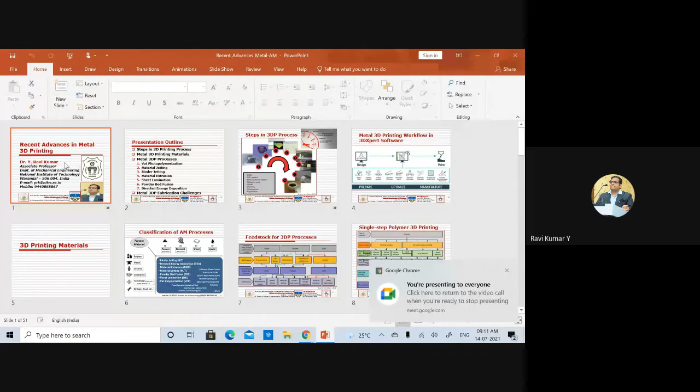You might have already been exposed to this exciting technology called 3D printing. During this session, I'm going to present the recent advances in metal 3D printing technology.

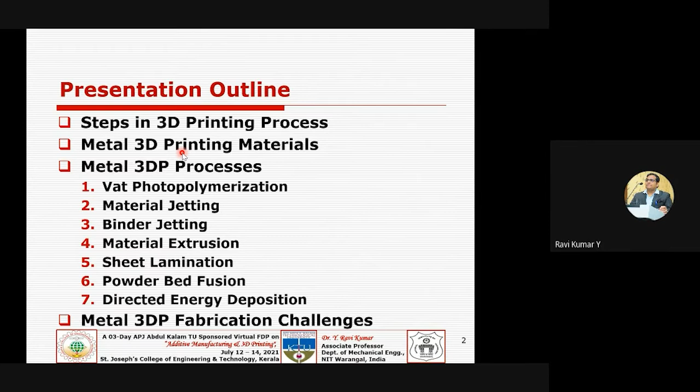Coming to the outline of my presentation, let us start with the steps involved in the 3D printing process, just a quick introduction to this process. We'll also be spending some time on the material aspects of 3D printing and metal 3D printing. You may wonder why I kept all these 7 processes listed here.

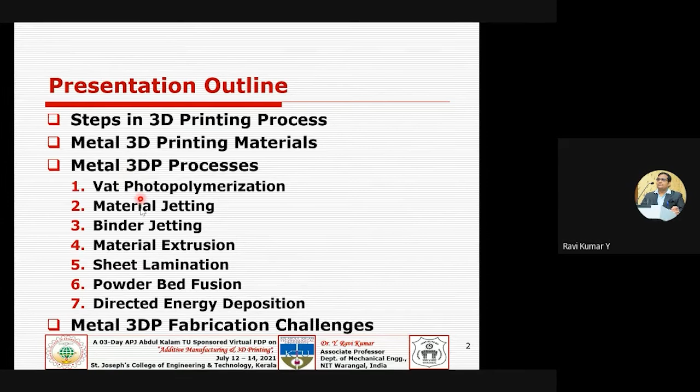So under the metal category, you may wonder about the scenario of 3D printing, formerly known as rapid prototyping. This journey started with a process called stereolithography, which comes under VAT photopolymerization. People used to print only polymers. I'm talking about the inception of this technology, that is the late 80s and early 90s.

The journey started with polymer printing, but slowly it captured the attention of manufacturers rather than just designers. Designers used to use this technology for validating their designs by making prototypes, but then this technology gained a lot of attention from manufacturers also.

So then coming to the technological advancements, even a VAT-based photopolymerization system now could be able to generate, to some extent, metal parts also, and ceramics also.

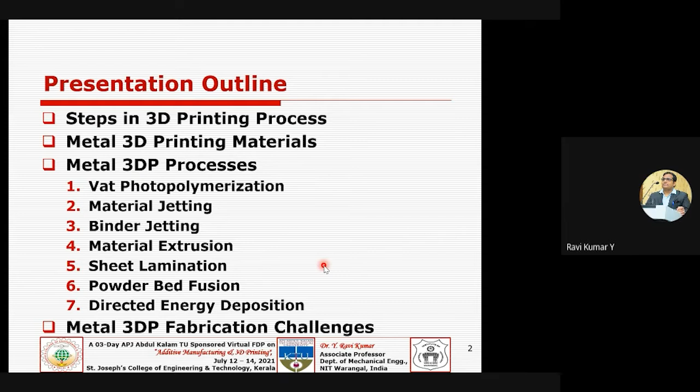So if you see the steps involved in the 3D printing process, first check what is your application, what is your product. The product may simply be a coffee cup, or an automobile, or an aircraft. But the application and the requirements may be different based on your application.

But whatever may be the application of your product, first we need to start with a CAD model. That is digital data as input, which brings our product into a CAD model, a computer aided design model, either a solid model or a surface model. And that model should be represented as a triangular mesh file, the so-called STL file, stereolithography tessellated language called STL.

And that STL file has been imported to an interfacing software, which will be connected to the printer. So you have an interfacing software, and that software will take this STL file as input, and we need to specify the process parameters.

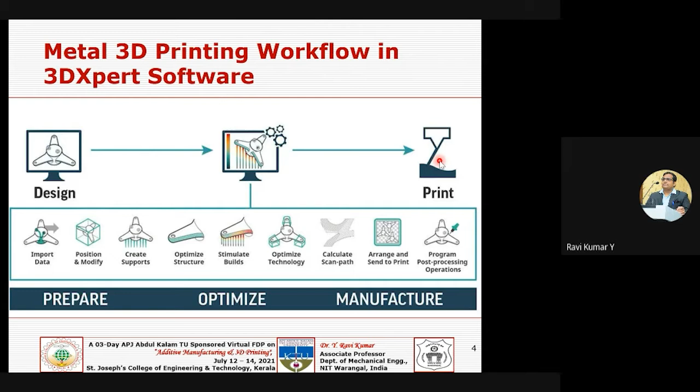So with this workflow, we will talk something about the material side - whether all materials can be 3D printable.

If you talk about engineering materials broadly, you have polymers - thermosets, thermoplastics and amorphous polymer groups - and you have metals, and metal alloys can also be processed through additive manufacturing or 3D printing. The same is true for ceramics and for composites, so all four standard engineering material categories are quite common in 3D printing.

Then we also have functional materials, like electronic or shape memory materials, which could have some specific functionally graded properties or specific functionality. So those materials could also be processed through additive manufacturing or 3D printing.

Apart from that, you can even process natural materials - it may be a biological material. Even now people are targeting bio-printing. I hope you have some medical sessions also, where you can print living cells or tissues, or scaffolds. You can even print food, or construction waste, or any sort of material you are looking at. So apart from the standard engineering category of materials, it is quite possible with other materials.

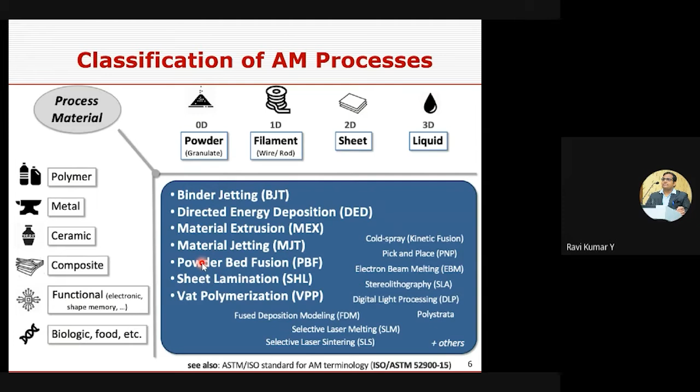Further discussing the feedstock of 3D printing processes - the feedstock's physical type when fed into the printer could be either a liquid form, a powder form, or a solid form. That is before it is fed into the printer.

Once it has been fed into the printer, what could be the principle behind how your raw material gets processed? Sometimes it may be through a chemical reaction like polymerization, or simply a jetting principle - inkjet or binder jetting - or sometimes you may be atomizing the powder or even a liquid. You can see some cross connections, not one to one, so we can notice developments of multiple materials or multi-form, from one form to another form.

That will enable you to go with multiple materials, or functionally graded materials, or even a sort of composite. So a powder may be atomized, or powder may be melted and solidified, or if you have a solid material, it could even be a joining process, like simply welding - your solid raw material can also be joined. Sometimes the solid raw material is getting melted and solidified too.

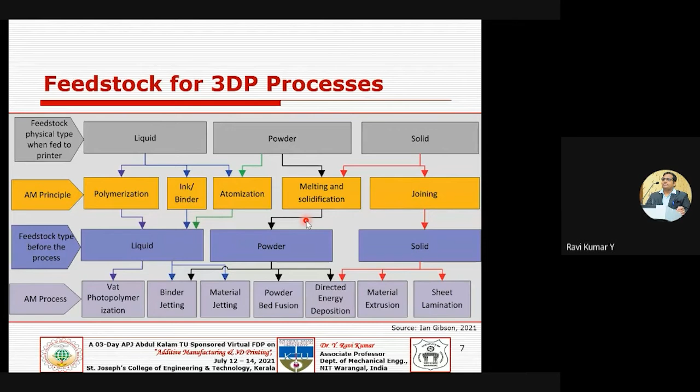Coming to the VAT system, only one form, that is liquid. Coming to solid, which could be predominantly sheet lamination and material extrusion process, the raw material is in a solid filament, a rod, or a strip. Or it could be a DED system, where powder can also be used as a raw material. Even a metal rod or a metal sheet can also be the raw material for directed energy deposition.

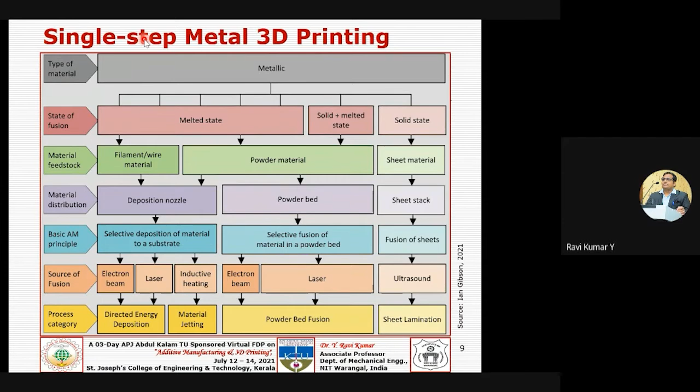This is about single stage, single step metal 3D printing, possible predominantly with 4 processes. And if you talk about multi-step, say, by any way I need to get the metal part printed - I have, even the VAT system can also be done. Ceramic or even metal can also be done, right? But how do you do that?

I'm not going to explain these steps, and I don't want to get you bored. But the idea here, keeping this slide, is that it may not be in a single step that you're going to get the metal part - you may get a green part, or you may get a combination of polymer plus metal, maybe some composite material which joins your polymer as an adhesive.

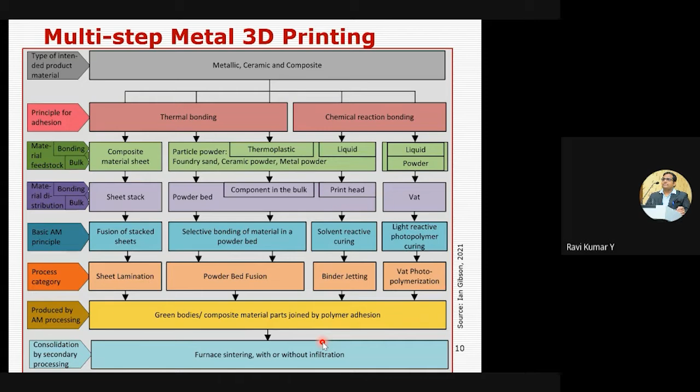So you have adhesion as a polymer with a metal plus powder. So then you take that green part and use the furnace treatment, making it a brown part by keeping it in a furnace and doing debinding. Sometimes we do infiltration, sometimes we do not. So what I'm trying to say is, by using a secondary process, your green part or composite part can also be made into a metal, 100% metal component. So with this background, let us talk about some of the metals, because our talk will be focusing on the metal.

If you talk about the iron-based group of metal alloys, you have stainless steel 316 and 316L, and it can be done directly with powder bed fusion, DED (directed energy deposition) system, and binder jetting technology. I'm talking about direct, but indirectly or as a secondary process it can even be possible with the VAT system. I mentioned this as a single-step process for processing 316, 316L, 304, 17-4 PH, 18Ni300, 15-5 PH, 420, 347, 1033, 4130, HY 100 steel, even tool steel H13, 4340, M2, and other iron or steel alloys like Invar and carbon steel. You have a whole series, and even pure iron can also be processed through either a powder bed system or a binder jetting system. These are the well-known iron-based alloys.

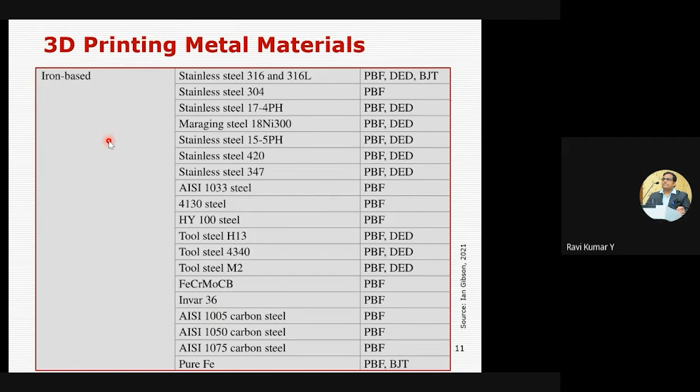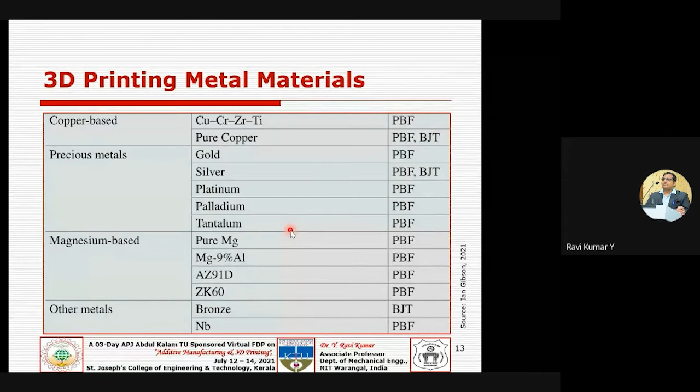So with this background, we'll see the advancements of these processes from the perspective of material, that is metal printing. And of course, let us start with the VAT-based system, because this was the technology with which the 3D printing journey started, a process called SLA, which Chuck Hull invented, based on the VAT-based system. So in the VAT-based system, as a single step, it may be only polymer or plastic, that is epoxy resin.

You will be curing your epoxy resin or photosensitive resin through either a laser—laser was the initial energy source it started with—but now even a DMD, that is a digital micromirror device, or an LED or LCD based projector system can also be used. The initial energy source was only a single point laser beam, so obviously the build time is high, because it is processing point by point. But with advancements, the entire layer curing can be done in a single go by creating a mask, so it may be 30 to 40 times faster than an SLA laser-based system compared to a projector, LED, or LCD based technology.

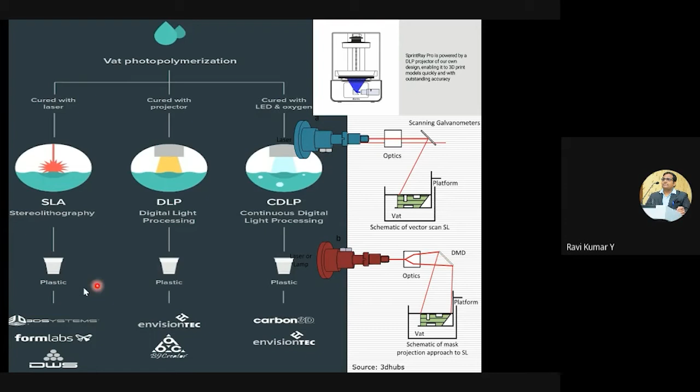But still the material is the epoxy resin. But why I've kept this here under the title metal printing, I will come to that. You can produce a metal or ceramic part even through an SLA or DLP based technology. How it is possible is that your photo resin is mixed with ceramic powder or metal powder, thoroughly mixed, and that mixed slurry is prepared and sent through this tube, and the working principle is the same.

I hope the previous speakers have given a lot of insight about these processes, but again I am telling you about the possibility of printing with metal. This technology started with plastic printing or plastic jetting using epoxy resin, similar to the previous VAT system. Instead of a VAT, you will be jetting from the nozzle - that's the only difference - but it works with the same chemical bonding, that is a polymerization process, which may be the case for epoxy resins.

What I'm trying to say here is there's a recent advancement under material jetting called nanoparticle jetting, from XJet, where you can even get metal printed through a material jetting system. Then you will be curing with heat rather than using any light or laser. So you'll be depositing this metal in droplets, and then use heat energy to melt rather than solidify it, to get your component. We'll discuss this further in the next slide.

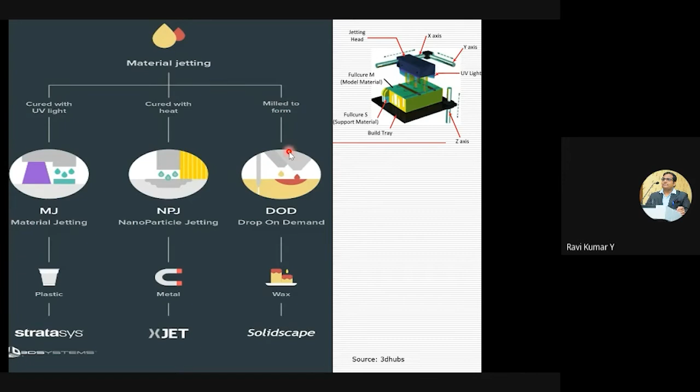Even wax is also possible with this - I think previous speakers might have discussed that, but our attention should be on the metal side. You do have beautiful polymer-based products, but coming to metal and ceramics, even that could be done, but not in a single step. Again it could be a two-step process where you're even able to print metals or ceramics through this material jetting system.

So then we need to say the metal should be jetted - that's quite funny, it seems, but you generate and create nanoparticles that get added into the liquid. Here you have support as well as model material, and you start with taking a CAD model, slicing, supports, all that stuff. The preparation of material is quite interesting and tricky here, and we need to jet this material. Then you have nanoparticles suspended, which get jetted from the nozzle at a 2 micron layer thickness.

So it is jetting from that nozzle, and depending on the temperature - meaning what kind of material you are processing, maybe steel, aluminum, titanium, or whatever material you're trying to fabricate or jet out - that depends on the heat energy source you are going to use, and correspondingly we need to maintain that temperature, the melting point temperature.

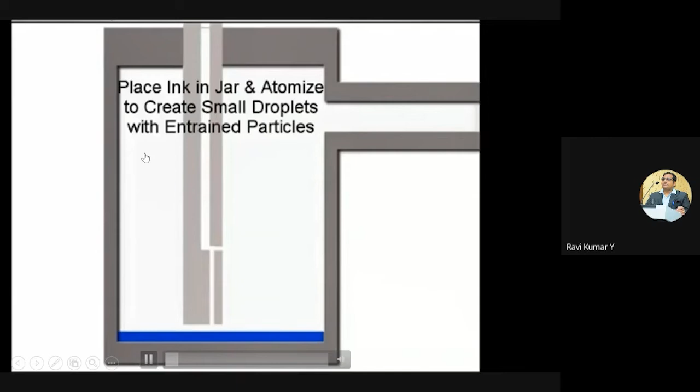Or even aerosol jet printing is another technology - let me see if this will work. In an aerosol jet process, you will be atomizing the material into a form of droplets, which they call aerosol. So that aerosol is prepared and atomized in an atomizer, and it is getting sprayed from this.

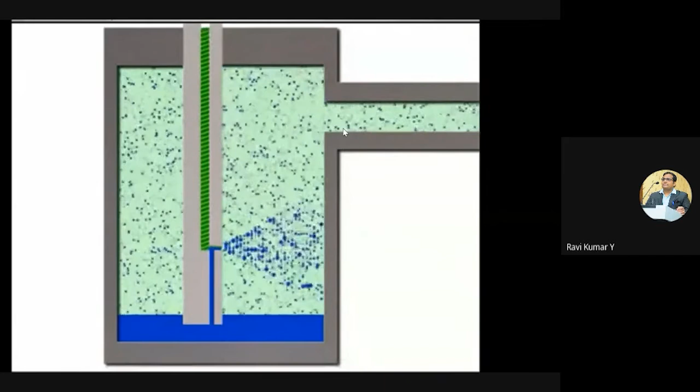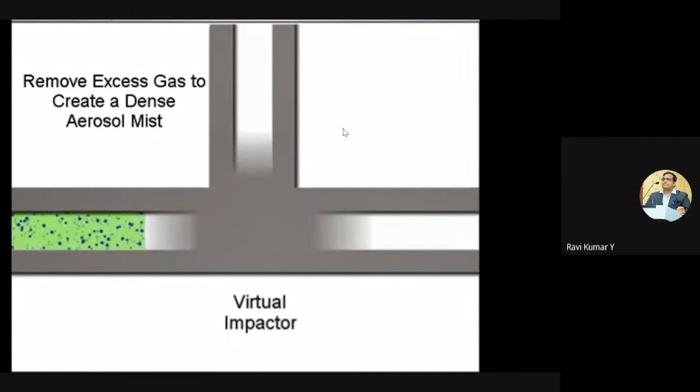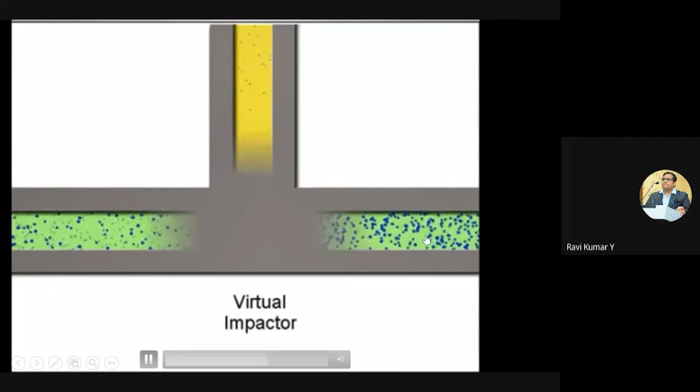Once it gets sprayed from this system, it goes all the way to this orifice to this side, where you have to remove some of the excess gases. So you evacuate those gases to create a very dense aerosol mist, which you will then be jetting through the sheath gas and depositing through this nozzle head.

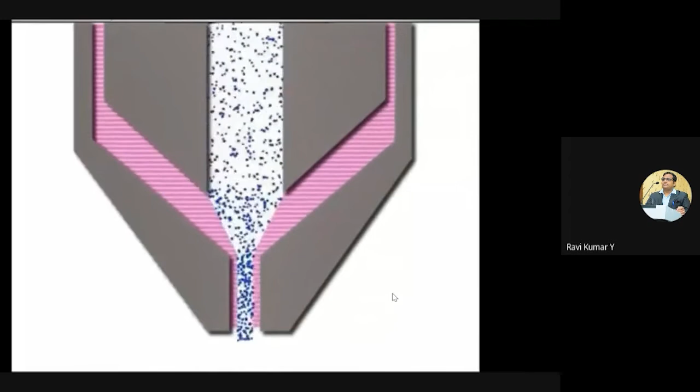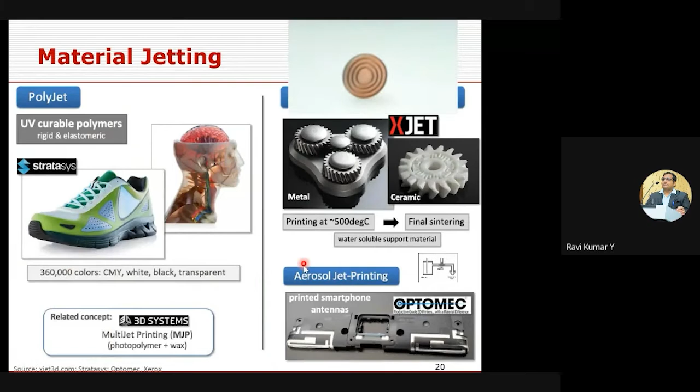So in this way, your electronic parts, electronic devices, and circuit devices can also be made using this sort of technology. It need not be restricted to polymer-based technology. It can also very well produce metals, right? That is my intention to highlight here.

And sometimes it could use electromagnetic pulses. So you take your raw material, say aluminum - an aluminum wire spool - along with argon gas. Of course, oxidation is a major problem here. Instead of printing through a powder bed system using lasers, here there is no powder and no laser, simply an aluminum wire spool.

You are just using electromagnetic pulses, which will melt your material. Argon gas is used as the sheath gas, and you have a ceramic nozzle which deposits the material. We do have several challenges here - it's not that easy, considering viscosity, surface tension, and other factors.

But people are doing it. It's gettable, right? So it is not impossible - people are doing it, it's possible. They are even attempting this with aluminum.

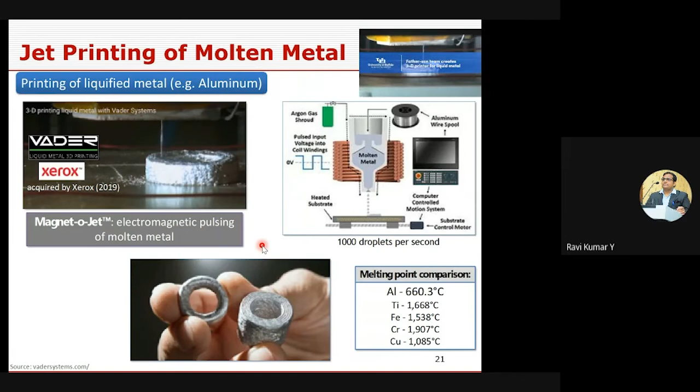It has come to the market very recently. So this is about material jetting technology for metal printing. Binder jetting is equivalently good for printing metal parts, but it need not be a single step - it could be a two-step process. This binder jetting system started with polymer as well as gypsum and sand kind of materials, but metal is also quite

gettable, printable - metal is also printable through a binder jetting system. This binder jetting system originated from MIT, the great university, and they sold the patents to 4 different companies like Z Corp, Voxeljet, ExOne, 3D Systems, and so on. As we know, HP are pioneers in 2D color printing, and they have come out with a similar technology called multi-jet fusion, but not exactly similar - it's predominantly for plastics. It won't work for metals, but our focus will be on metals, so we will focus on that.

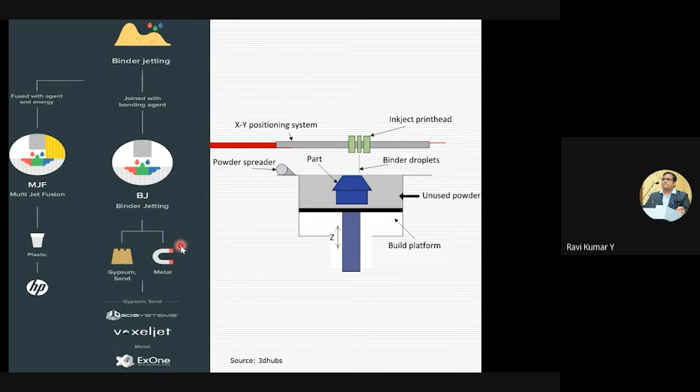So the name says it's a binder - you are going to sprinkle it from the nozzle, simple as that. You jet the binder from the nozzle, and you have this ink or binder which has an absorbing capability, getting absorbed into your powder particles. Basically the raw material is a powder granulate, and your binder, having this absorbing capability, forms a bond. You then use IR light to sinter it, and finally you get your sintered polymer.

Similarly, it could work for metal too, but not in a single step. We'll discuss how you are able to get that in case of a metal system. For the metal system, the working principle is the same - you need to jet out the binder from a series of nozzles.

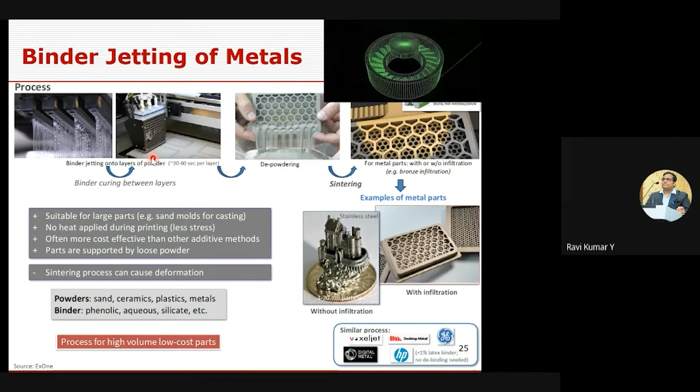That binder jets out onto the powder. The raw material is powder, laid in the form of a bed, and you sprinkle your binder onto these powder particles, curing between the layers. You get only a green part initially, which is then depowdered and finally sintered in the furnace, and even infiltrated with a bronze kind of material.

It has been infiltrated. After infiltration and sintering, this green part has become 100% metal. But it is not a single step process, as I mentioned, so sintering followed by infiltration could give the metal component.

As we know, this technology has been proven for sand cores, ceramic parts, and of course polymer parts, and now it is also for metals.

You may choose the combination binder with your powders. Say you have different binders here. If you want to process metals, you may use a polymeric binder. If processing ceramics, use an appropriate binder. If it's simply a plastic or plaster kind of material, gypsum kind of material, you use a water binder, or an aqua binder. So depending on the type of material, from polymer to metal to sand to ceramic, you choose an appropriate combination of binder.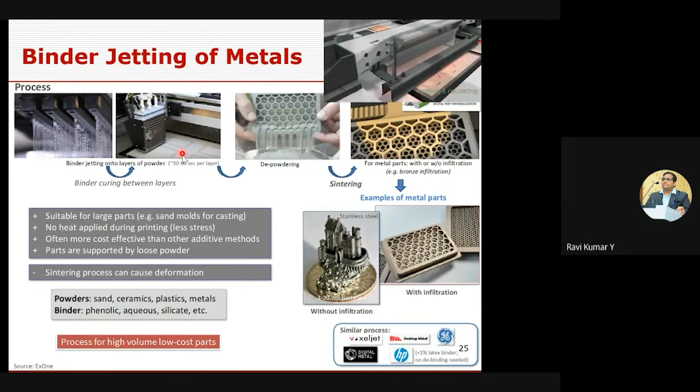So this is a typical binder jetting system for metals. And you may wonder, why is extrusion based printing of metals possible? You may get some question in your mind, why?

If 100% of people know about 3D printing technology, undoubtedly it is extrusion-based system, that is FDM based system, the filament based FFF kind of system. Why? Because these are open sourced or DIY kind of printers, which after the RepRap movement became open sourced.

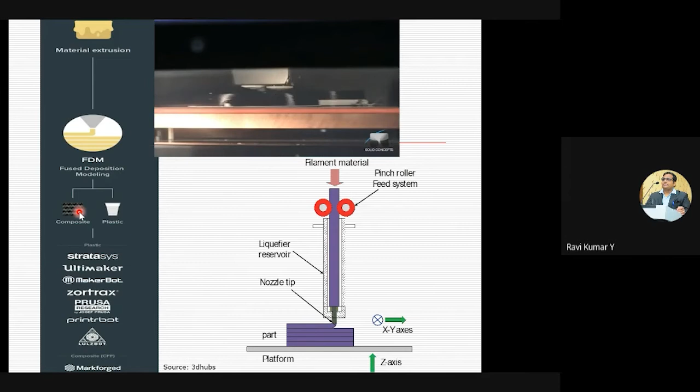Right, which you may be predominantly using plastic, ABS, PLA sort of polymers. In recent times you have composites also, processed through this FDM based system. Even metals are possible.

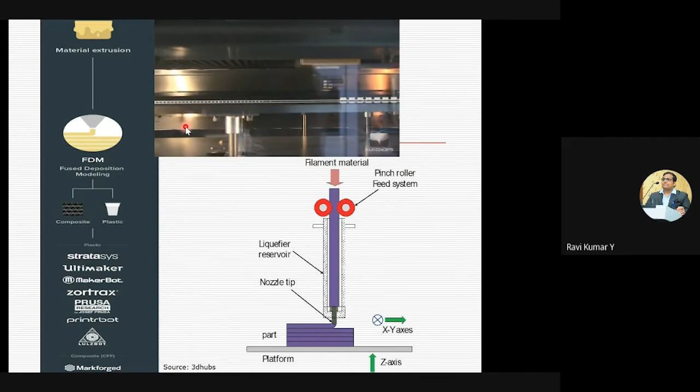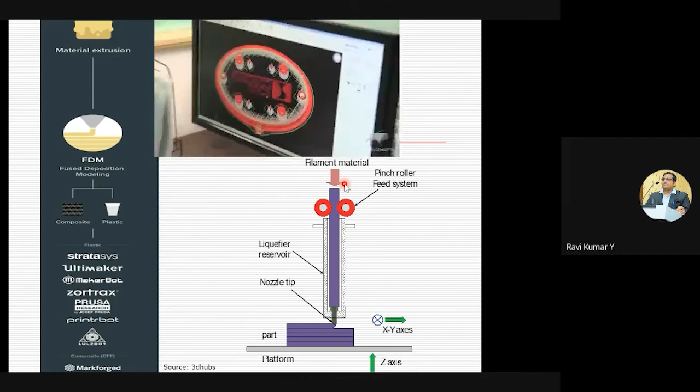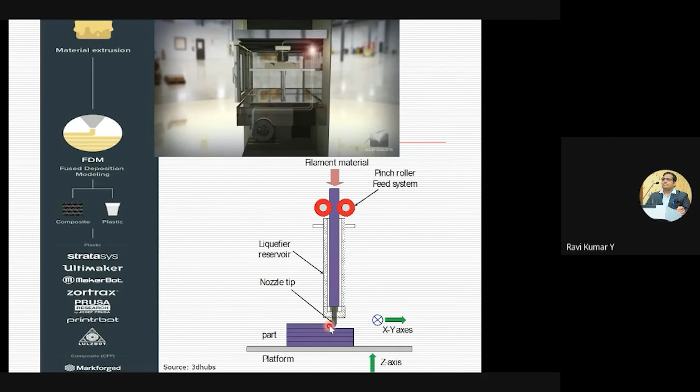You may already be exposed to this process, how it works. This may be the default printer wherever you can find. This is an extrusion based printer, which uses filament typically 1.75 or 2.85 mm diameter, two standards available. You melt it and squeeze it to deposit, basically in a liquefied state it comes and falls, and gets fused one layer upon another layer.

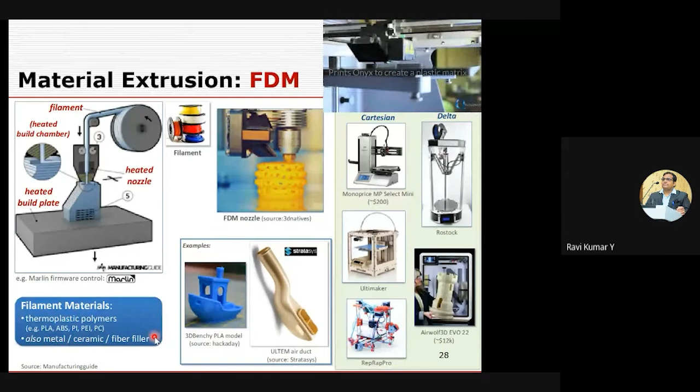That's common in FDM based systems, where you have a model and a support material, and you may be very familiar with Cartesian, delta, or other configurations of this FDM based system. But my focus will be on the metal side. So this technology is so far very good for thermoplastic kind of polymers, but now it's also being used for metal, ceramics, and fiber fillers or composites. It is quite prominent in recent times.

Right now our focus will be on metals. So how do you get your metals printed through an FDM based system? Instead of a filament wire, you start with a metal rod, of 316L, or any sort of metal that you're looking at.

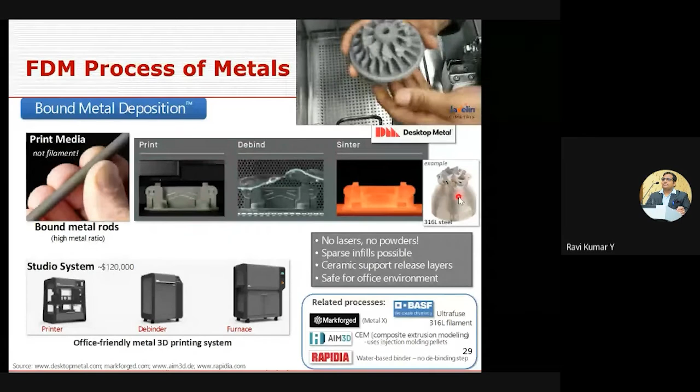Again, this is not a single step process. It may first be printed through the same principle, and then you debind it in a debinder, and finally sinter it in a sintering furnace. Finally you are left with your steel component, 316 or any other, with no laser, no powder.

It's much more economical than the powder bed or DED system, which will cost you around 4 to 5 crore rupees. This technology is quite interesting and more economical. If you do a cost to cost comparison of parts between powder bed and FDM based metal printing, obviously it should undergo printing, debinding, and furnace treatment.

Let us focus on the next technology, that is sheet lamination, and the scope of metal. My perspective could be in that way. I don't want to repeat whatever the previous speaker might have explained about these processes, but my intention is whether metal parts can be printed out from this particular 3D printing technology.

Sheet lamination, if you talk about it, is an ancient technology where we need sheets of paper, or sheets of ceramic coated papers, or even polymeric binder coated sheets, or a typical soft material normally.

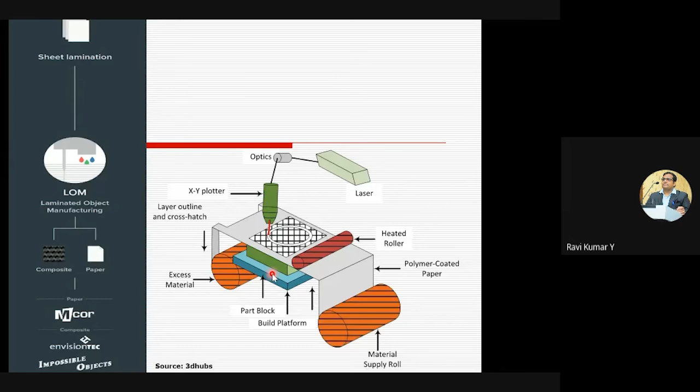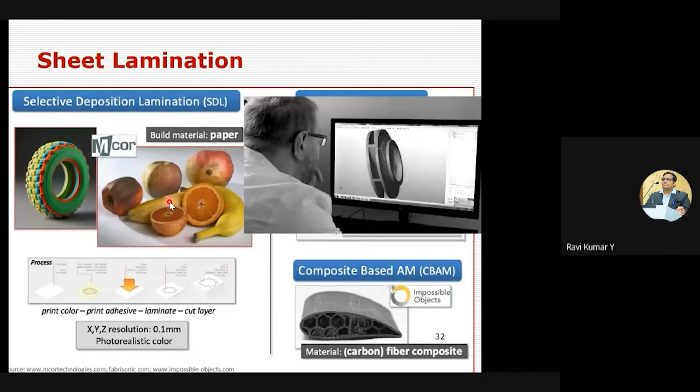It is a very well-known process under this 3D printing technology. So you can print in different colors of paper, or even use ink to mix up these colors. You need not use a laser to cut paper or soft material; people realized you can just use a knife to cut the paper or material. Right now you may even be focusing on carbon fiber composites through a sheet lamination process. So it is quite gettable.

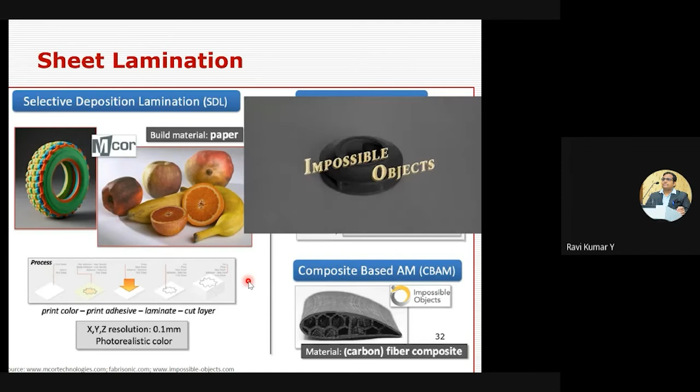So it could start with you preparing a laminate which has been jetted, printed out from your sheet lamination based system, and finally you remove those things, and you're left with your carbon fiber composite component. So that is through a sheet lamination based technology.

And quite interestingly, as I already said during my previous slides, welding, ultrasonic welding or solid state welding is also a joining technique used in a sheet lamination process called ultrasonic consolidation. So it is a hybrid process basically. You take the raw material as a metal strip, maybe copper, steel, or aluminum.

So whatever material you bring in the form of a tape, you can see those tapes, or even get it by CNC milling. It's a hybrid process, as I said. Like you do a certain number of tries, maybe 10 tries with contour milling, and then followed by welding technique. Basically, it falls under additive manufacturing since you will be adding these layer by layer.

And joining it through an ultrasonic sonotrode or ultrasonic welding technique. So it is a hybrid process where you will be combinedly milling and then joining through a welding process.

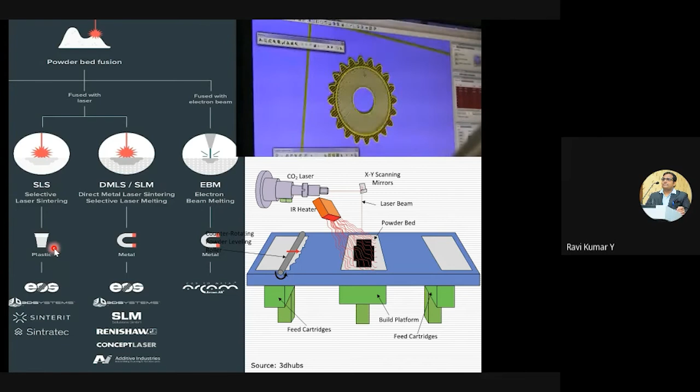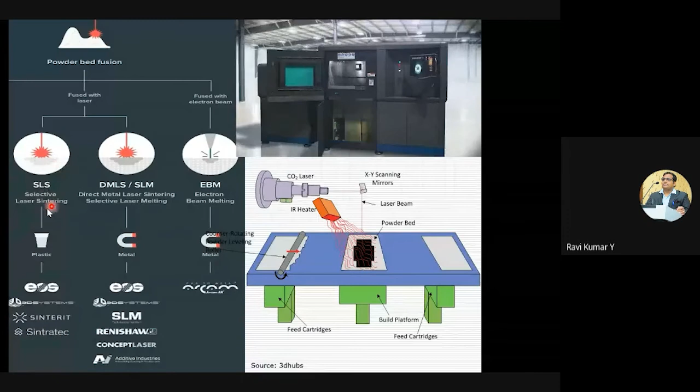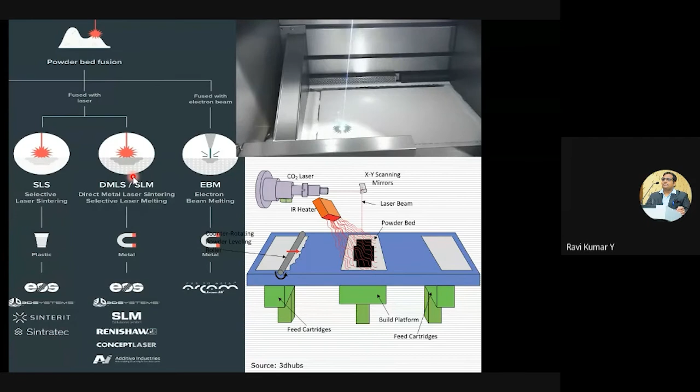That was the technology for polymer, or even for metal, or for composite. But slowly that has been modified by German technology. Why I am quoting this is, though this technology started with SLS based technology with polymers, metal printing has inclined towards German based technologies, where a lot of German or European companies have developed proprietary names like DMLS or SLM, but basically it falls under the powder bed classification.

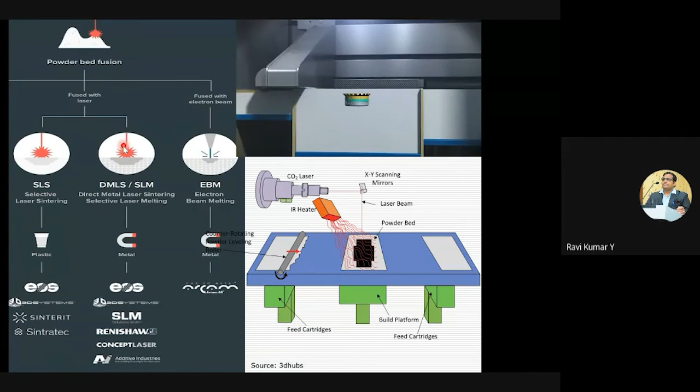So as we know, you may use either a laser as an energy source or an electron beam as an energy source. This is a very well-known metal printing system. Over the period of time, it has been established.

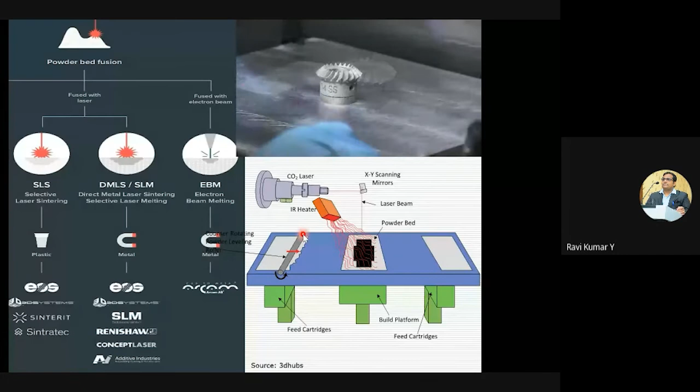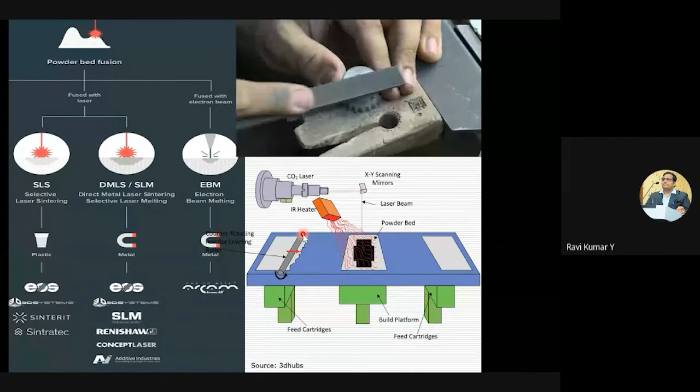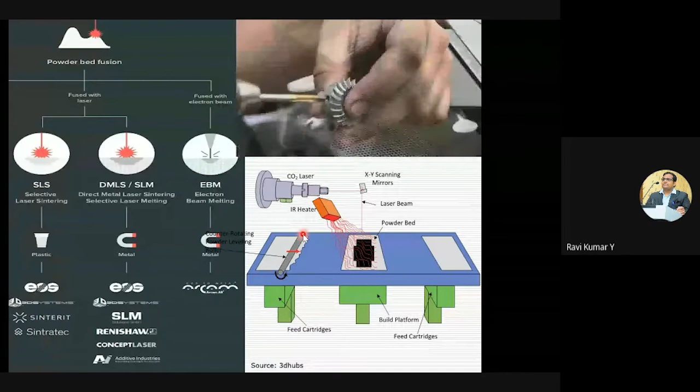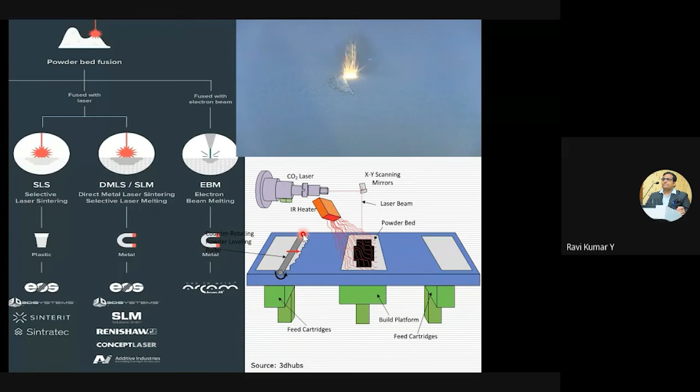This need not be an economical solution, because these machines are very costly. But in recent times, the key patents of the powder bed system for metal printing have expired, which means we can find some open-source options. We can definitely see the scenario we are enjoying right now for the FDM based system, but not up to that level, some extent though we could, because this technology requires a laser or an electron beam or some sort of energy source. But like FDM systems which don't require such components, it may become more economical and cost effective. But definitely it is not 4 crore or 5 crore.

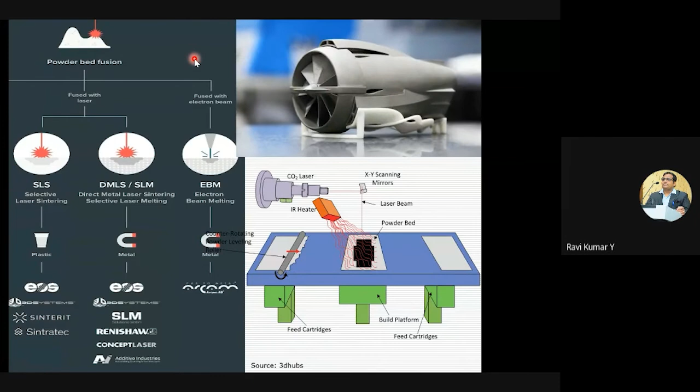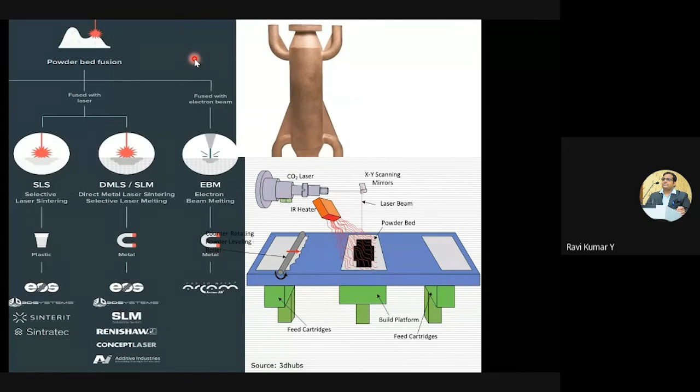Once you have a laser with a 100 watt or 200 watt laser which you could integrate, people have already started to develop their own metal 3D printing systems through a powder bed system. I know at least a couple of people are already bringing their product into the market.

So let us talk about the advancements of this powder bed fusion technology. The major headache here is the support structure in any powder bed system with metal printing. So how do you make it support-free, or with overhang angle maybe 10 degrees, typically 40-45 degrees we need to build a support. Again it depends on whether it is a down-facing or up-facing surface, and other such headaches come into picture.

But anyway, people are putting a lot of effort to develop advanced systems which may simplify your support structure requirement, so that complex structures can also be produced.

Another problem with this - I have a slide at the end where I will show you the print rates, the printing speed. What is the, say, kg per hour or grams per hour you are going to print - what could be the speed? Definitely it is not that great as far as speed is concerned.

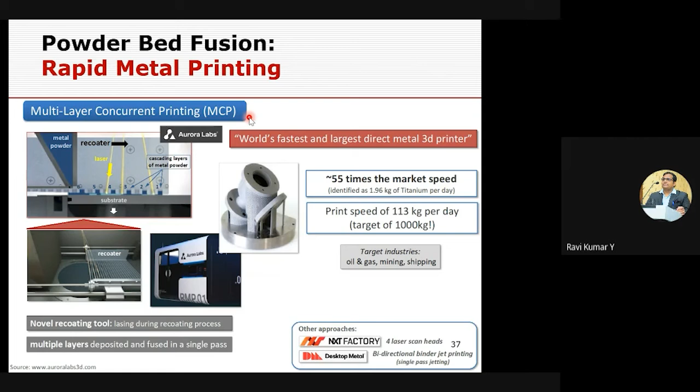Let us come to the last process, directed energy deposition. This is very close to the welding technique - you can find your TIG welding or MIG welding. It's very similar to a TIG welding process. You may also come across laser cladding. Directed energy deposition is predominantly for metals, so it is a single step metal process.

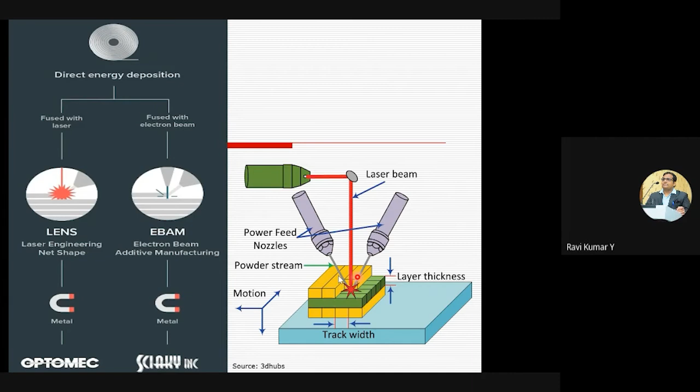It is predominantly for metals, where you can fuse with a laser, electron beam, or plasma. Basically you use a high power laser, and supply the powder from nozzles through carrier gas, with an inert environment inside, consolidating the layers. You have a lot of freedom here - the 5-axis freedom reduces your efforts towards support structure generation, giving more degrees of freedom. You can use either laser energy or electron beam energy, and use powder as the feedstock, or it can be a wire - a blown wire technology, powder blown, or even wire fed systems.

Wire arc additive manufacturing is very similar to the TIG welding process. Even people are aiming to fabricate very big sized structures, maybe even fuselages, and people are targeting to print through this DED system. You do need certification from the Federal Aviation Administration for parts used in an aircraft, like maybe Boeing or Airbus or GE, either for structural components or underhood components, maybe jet engine components like nozzles.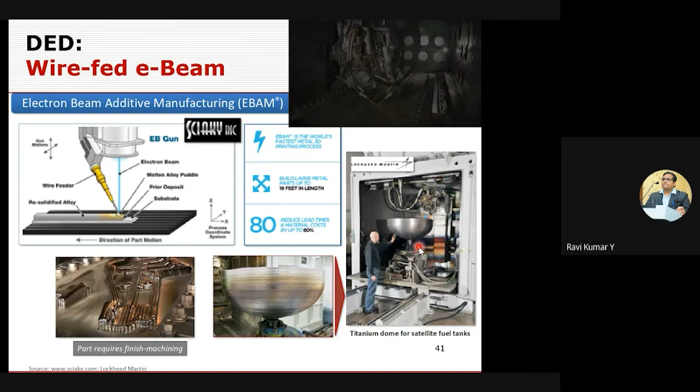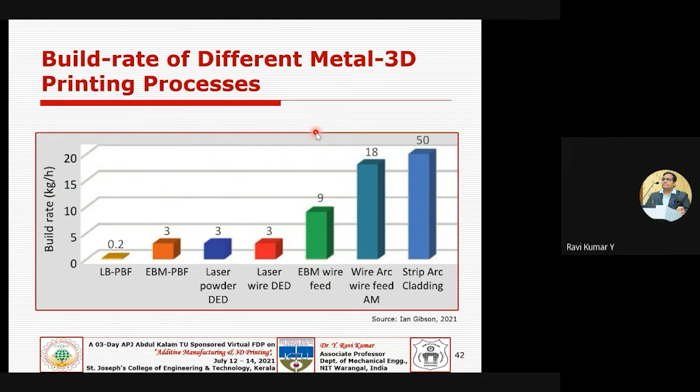Before concluding, let us focus on some of the 3D printing fabrication challenges that you come across. But we cannot generalize these challenges, because polymer will behave differently and metal will behave differently, and you have different feedstocks and different energy sources. But definitely we have a lot of fabrication challenges - it is not that easy, as we are seeing only one side of the coin.

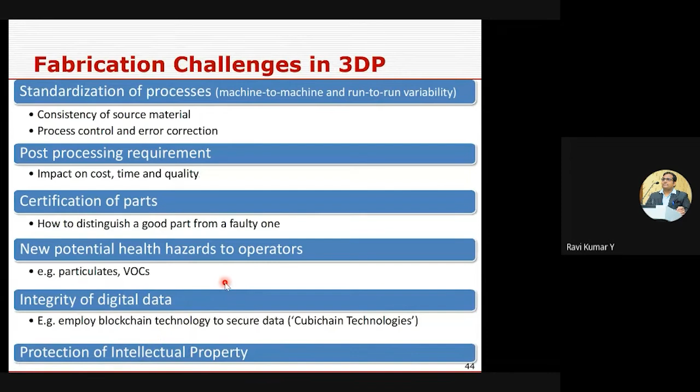So like that, we can keep throwing out several challenges. Broadly, if you take each and every aspect, right from the material type, powder size, powder purity, and so on, and on the design side, the geometry or overhang and support structures designed for additive manufacturing - support structures, overhangs and other aspects.

And of course layout aspects, like horizontal and vertical orientations, object proximity, chamber filling, and other challenges you come across while fixing your build setups. And then while processing, you may have roughly around 180 parameters that dictate the quality of the parts you are getting fabricated.

And again, you cannot standardize - you cannot draw conclusions based on experiments conducted, and then generalize, because one time you've done something with steel powder, another time you may be using titanium powder, and some other time inconel. You cannot standardize those parameters since they behave totally differently. Titanium is a reactive material, whereas steel is not reactive. So how do you correlate your parameter set?

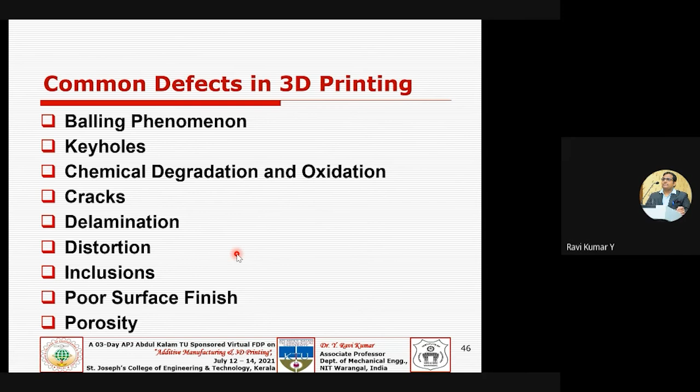Definitely it's going to be very interesting stuff, where you have a lot of scope to do research in metal printing, or in general 3D printing as such - right from your design aspects to surface structures, to topology optimized structures, to your process parameters, optimizing the process parameters, to whatever these common defects which you can focus on. You can pick one defect and attack onto that, and then make some samples and conduct a lot of research on these areas, right? So somebody may be looking for this - I hope the previous speakers also might have given a lot of research problems to you. You can have a lot of scope to work on this, and we do simulate it, right?

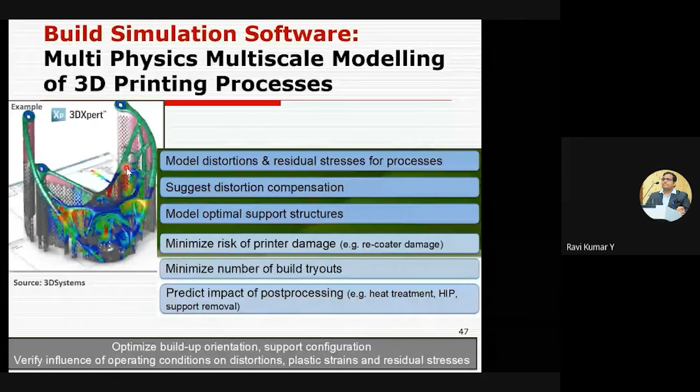You can optimize the build orientation, support configurations - you can say operating conditions - based on distortions, plastic strains, and residual stresses. This is a burning topic in this area where you can target residual stresses; this is the kind of thing you can work on as a research problem.

Before concluding and handing over to the organizers, you may be curious - I have been saying standards are not there, standards are not there, but how many standards have actually been published so far? We can find hardly around 35 to 40 standards already published, and another 35 to 40 under development, under trial, or under evaluation. There are some terminology-related standards, which is a combined ISO and ASTM development, with specific numbers for that.

If you're looking for design aspects of the standards from ISO as well as ASTM, some of them are a combined effort from ISO and ASTM, or some of them may be developed independently by ASTM. And coming to the design...

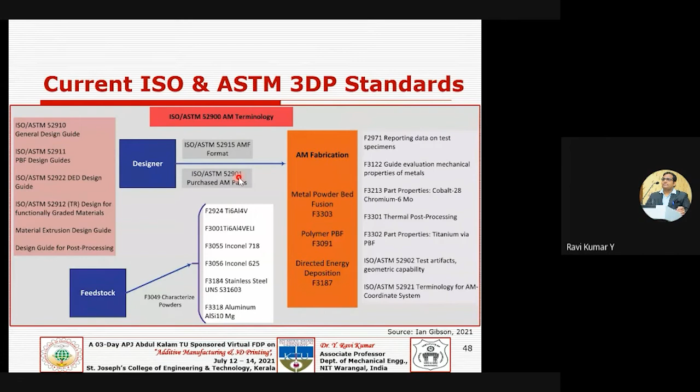So like that, you can find other standards as well, around 35 to 40 that have already been published.

Let me summarize what I have covered over the past almost two hours. We started with the various steps in the 3D printing process and some workflow of metal 3D printing technology, and discussed some material options and processes from the perspective of metal printing. All seven processes were discussed with the perspective or possibility of metal printing, along with fabrication challenges, common defects or errors, and the state of the art of standards in 3D printing - I hope I've communicated all of that in a single slide.

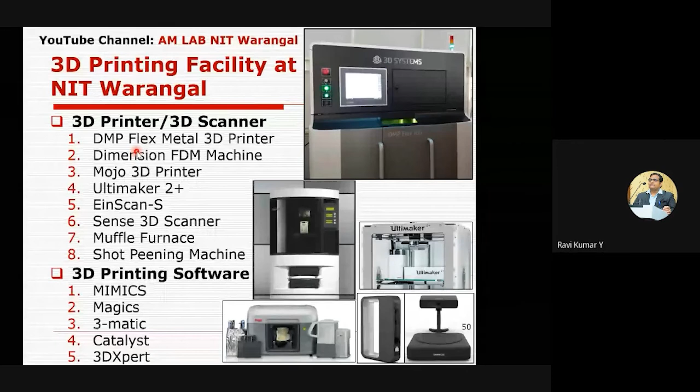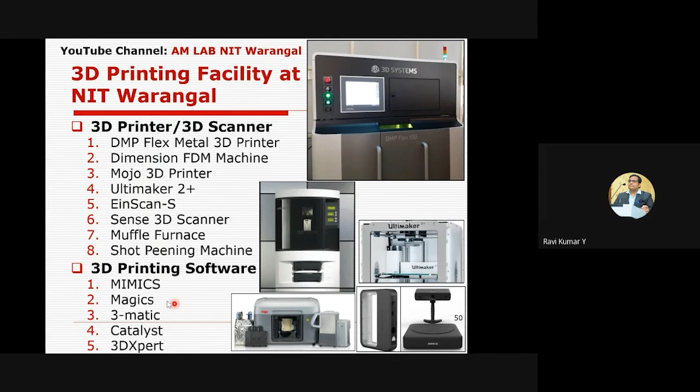Before handing over to the organizers - we have a facility here. We are running the additive manufacturing course for the first time in India as an MTech specialization, and we have a metal 3D printer using powder bed technology from 3D Systems, the DMP Flex metal 3D printer. We also have a couple of Stratasys FDM machines ranging from the Dimension to the Mojo, and desktop printers like the Ultimaker 2 Plus and other DIY printers. We also have EinScan and SenseScan for scanning, a muffle furnace and a shot peening machine for post-processing of metal 3D printed parts, and software ranging from Mimics, Magics, 3-matic, Catalyst, and 3DXpert.

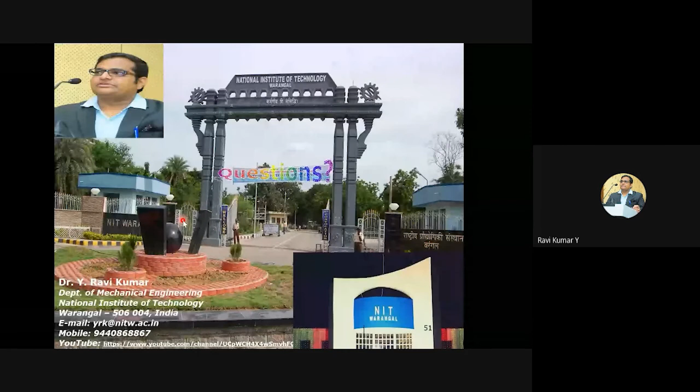I think I have done from my side, and I may be the happiest person if you suggest me the presentation, as well as correct me if I have any mistakes, or if you have some clarifications or suggestions.

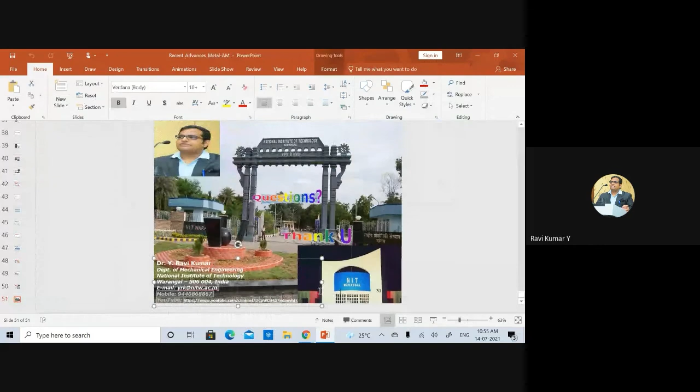Yeah, definitely you are most welcome. So it is over to you.

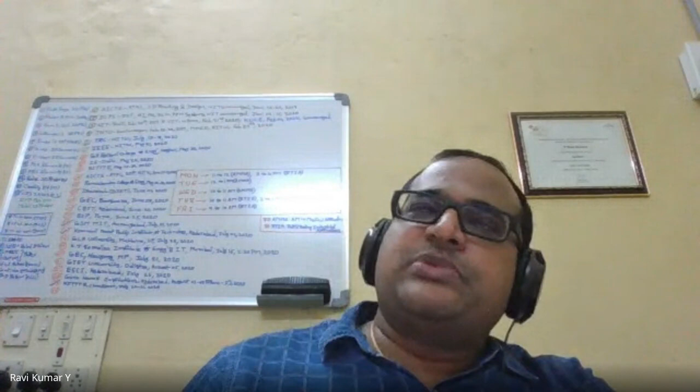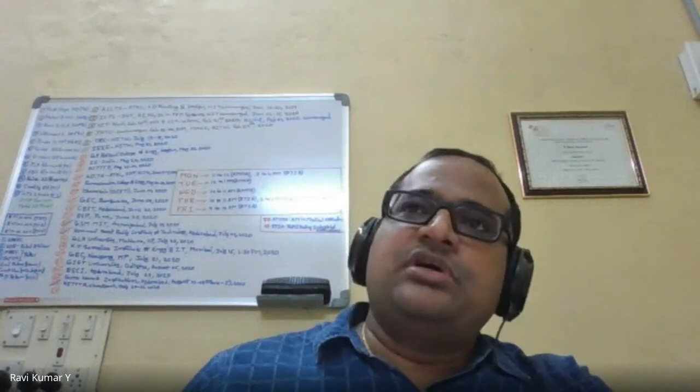So first we need to understand how many components you are looking at. It is not meant for mass production, and even not for reasonable lot sizes. It is for specific requirements where there is complexity and difficulty in conventional manufacturing methods. As complexity increases, conventional manufacturing costs increase exponentially, but that can be justified wherever you have more complexity that cannot otherwise be produced through conventional methods, and where you need a lot of customization in your products. Only then is the cost justifiable.

If you compare head-to-head with conventional manufacturing systems like machining, it is not justifiable, but there are conditions applied. You need to see the circumstances where you need customization, looking for relatively less quantity.

Is there any commercial product from metal 3D printing available in the market? You can find service bureaus, or products you are talking about - you can find several.

Aerospace industry is one area, where people are printing one-third or half of jet engine components, targeting to print them through metal 3D printing systems. Medical implants is another area where metal printers are directly used to print implants for biomedical applications.